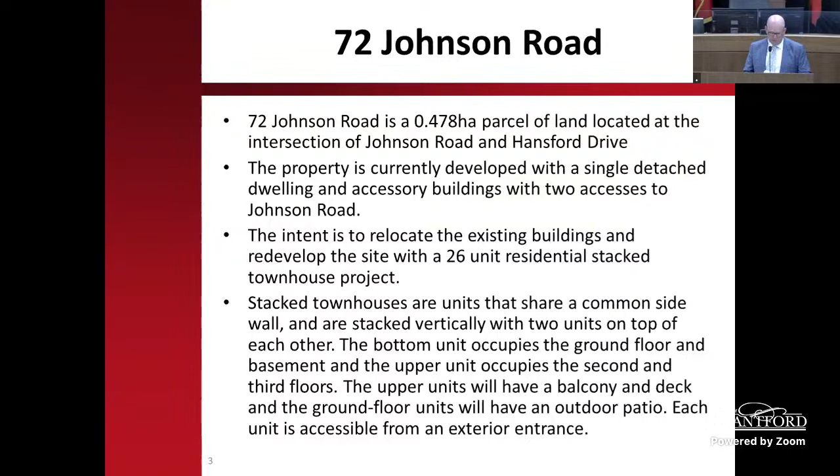As Mr. House had mentioned, there is the official plan for the city of Brantford, and the lands are designated residential. The residential designation contemplates single detached dwellings, semi-detached dwellings, duplexes, triplexes, and townhouse dwellings. There is a limitation that buildings shall be no more than 3 stories in height, and stacked townhouses are a permitted use and conform to the policies of the official plan. As such, an official plan amendment is not required in support of this development.

This project is considered medium density development, which is commonly referred to as the missing middle. The official plan also designates Johnson Road as a local road.

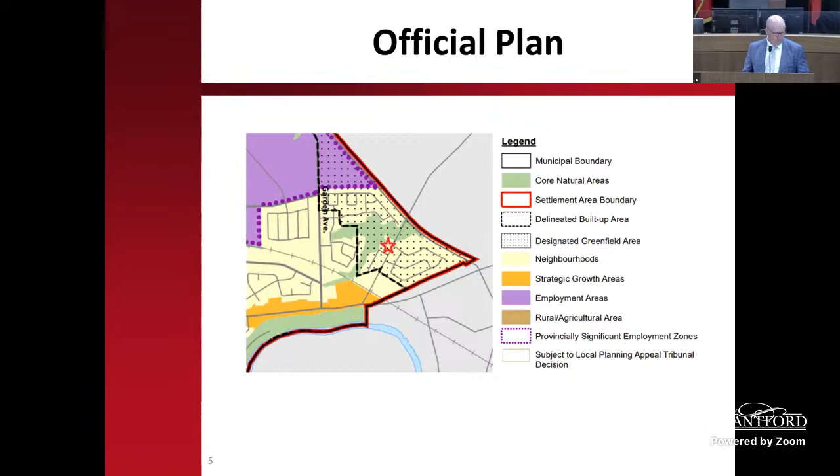So the amendment that we're seeking is to the zoning bylaw, and the zoning is currently H-R1B-13. The R1B zone currently applying to the property permits single detached dwellings, bed and breakfast establishments, day nurseries, home occupations, and mini group homes.

The H part of the zoning reflects a holding provision. Basically, it locks in what's there today and does not allow for any other development until such time as the holding provision is lifted. The -13 part of the zoning is a special exception, which would allow all the uses of the R1B zone when it was applied to the property, as well as any existing use that was in place at that time.

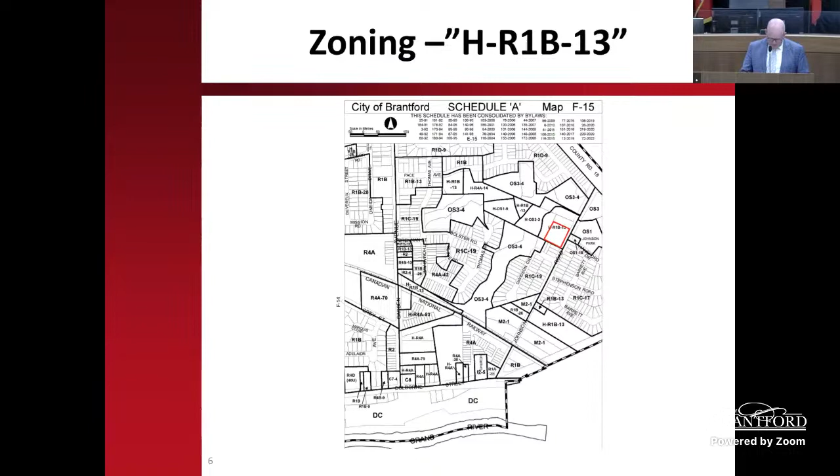So as noted, a zoning bylaw amendment is required to change the zoning on the property to allow the stacked townhouses and apply appropriate regulations.

This is a copy of the concept site plan, which is also available in the side displays. The development project includes 26 units, as I'd mentioned. There are 45 parking spaces, including 2 barrier-free parking spaces. The zoning bylaw requirement would be 39 parking spaces on site.

There's in-ground garbage facilities located in the middle of the property. An on-site amenity area is proposed in the top left corner. A single access to Johnson Road is proposed, allowing vehicles to enter and exit the site in a forward motion.

As you'll see on the screen, there's 2 buildings that are focused and face towards Johnson Road, with the other 2 buildings at the rear of the site. These are 3 stories in height.

The blue line at the top of the screen, hopefully you can see that - there's 2 blue lines. One represents the wetland limit, which has been field verified and identified. The second blue line, which encroaches onto the property, is actually a buffer area to protect the wetland that was just located off-site.

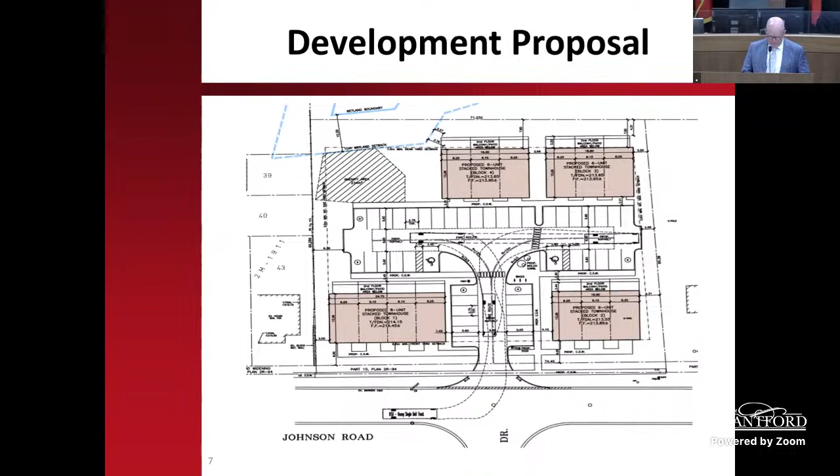The zoning bylaw amendment will seek to change the zoning from the R1B zone to an R4A zone. As I noted, stacked townhouses are not currently permitted in the R1B zone, so a zone change is necessary. Stacked towns are actually defined in the bylaw, but they're not permitted in any zone currently in the city of Brantford. They're only permitted through a zoning bylaw amendment.

The regulations of the zoning bylaw would require 185 square meters for each unit. We're currently at 184 square meters. So it's a minor deviation from the R4A zoning.

Again, just for your reference, for those not familiar with stacked townhouses, this is just an illustration of how those units are actually devised. When you walk in at grade level, your unit is at the grade level, and then you go down to the basement. So you have those two floors that comprise one unit.

When you walk in at grade, you also go up a set of stairs, and the upper two floors represent another unit. So this is conceptual for how a stacked townhouse works, and this would be refined going forward to suit the site.

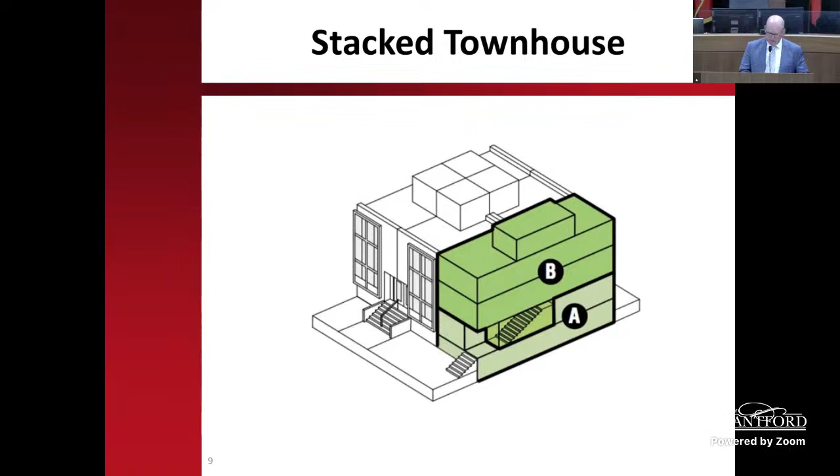These are the conceptual building elevations proposed for the development. This is the front elevation, which would be facing towards Johnson Road.

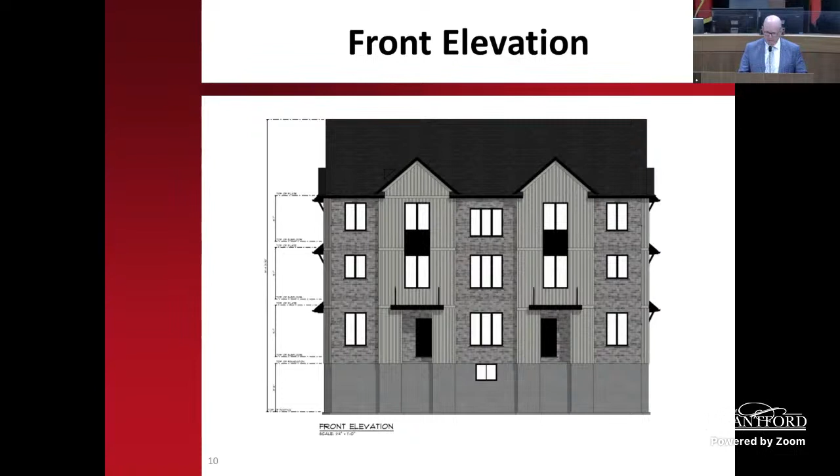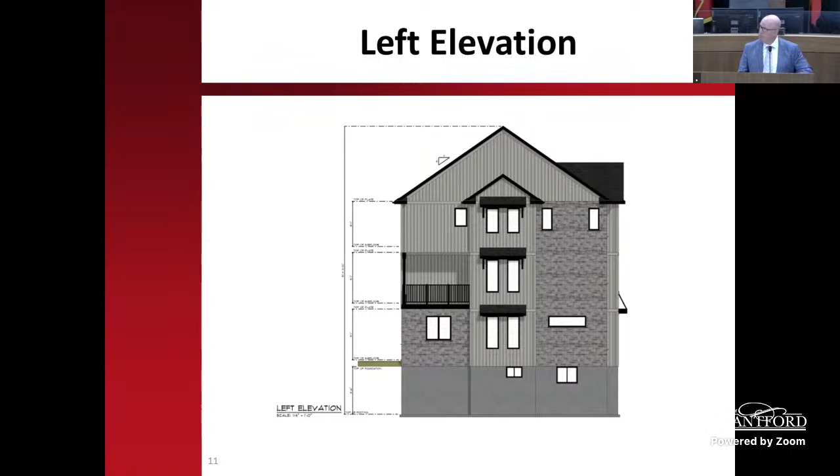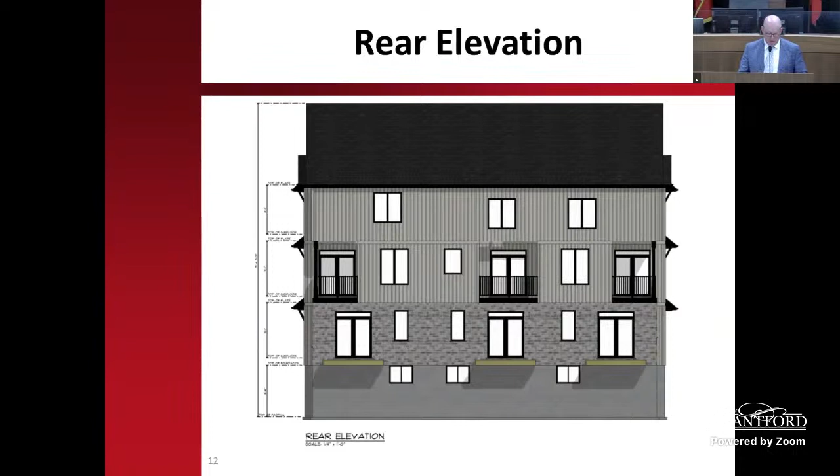A left elevation, just the side of the building that's proposed. This is the rear elevation currently proposed. Again, this shows a 4-story building, but the lower level is actually below grade, so it's 3 stories above grade.

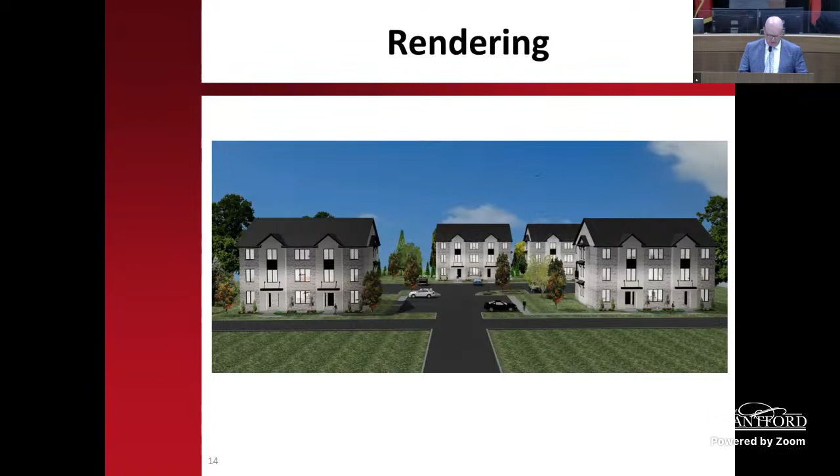In support of the application, we submitted an environmental impact study that identified the wetland, located off-site, and recommended a 10-meter buffer to that feature. We submitted a traffic impact study, which resulted in no traffic improvements required on Johnson Road.

We submitted an archaeological study and a planning opinion report, as well as functional servicing drawings and a report, along with servicing drawings and a grading plan for your reference. All of those plans and reports are currently under review by city staff. They will be reviewed for their technical nature to make sure everything complies with city requirements, and we don't have comments back on those yet.

The proposal is consistent with the provincial policy statement and conforms to the growth plan and the city of Brantford official plan. As noted, an official plan amendment is not required. The project will result in the creation of 26 residential units, and the wetland area has been identified and protected.

The rezoning is required to implement the project, address the site-specific provision—being the reduction in lot area per unit from 185 to 184—to lift the holding provision currently applicable to the property, and essentially just to allow the project to advance.

Going forward, pending the successful completion of the zoning process, site plan approval will be required. For those who don't know, site plan approval is the technical design drawings related to a project—relating to site engineering, landscape plans, lighting plans, and all of that. So there is a detailed stage to go forward, subject to the zoning.